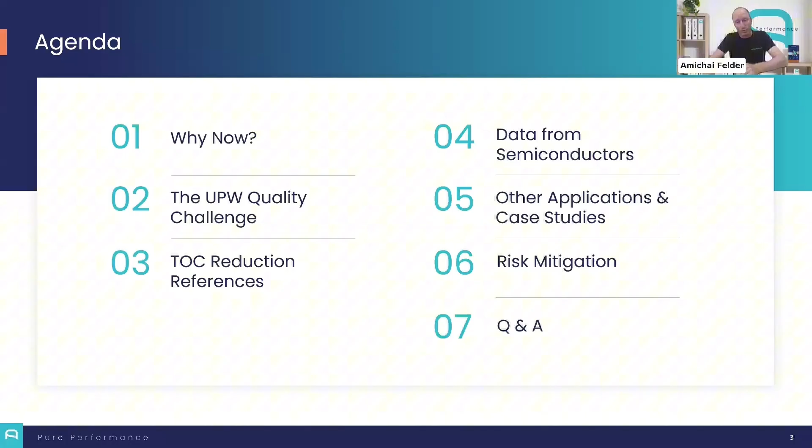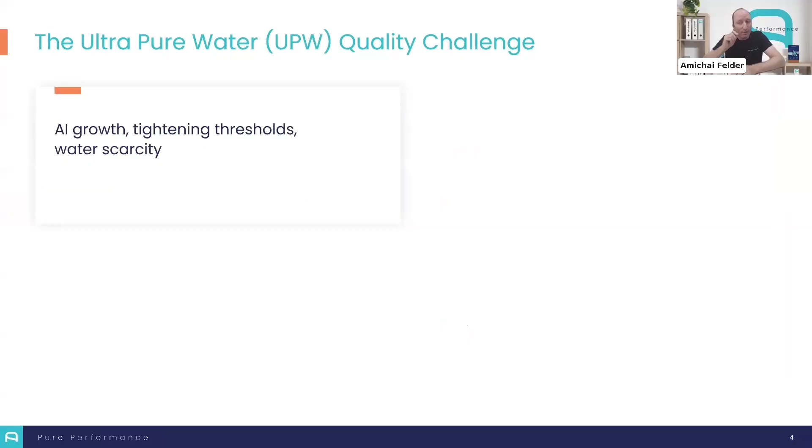Lately, the growing trend in production of advanced microelectronics and semiconductors has brought the need for a large volume of water with extremely low TOC residuals. The shift from surface, ground, or tap water to alternative water sources, such as wastewater, has also resulted in challenges of removing specific undesired compounds from the process. A good example is urea, if municipal wastewater is the source, or IPA, isopropyl alcohol, if the plant is reusing water within a cycle.

Now, I'm quoting from an article published lately: the trend of building reclamation plants is no longer a future trend, but rather a response to the challenges of water scarcity and the need for sustainable practices. TSMC's initiative in Arizona is a significant step towards achieving near zero liquid discharge. So the usage of alternative water sources and zero discharge is already here.

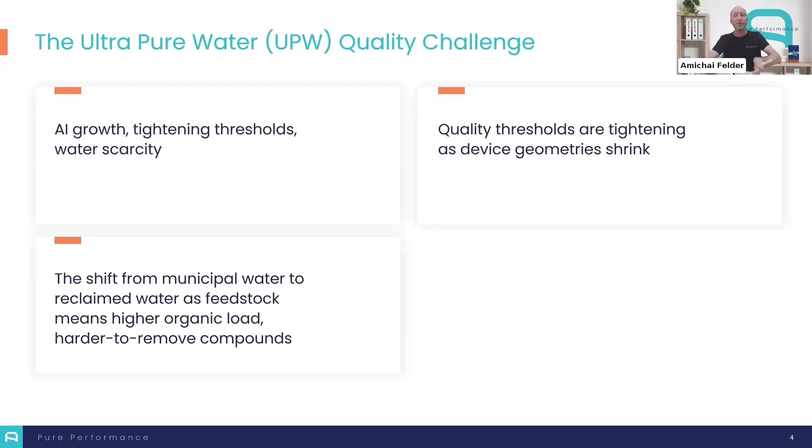In parallel, the thresholds for specific and non-specific TOC are going lower, and it's now easier than before to detect low levels of pollutants. The wafers are going smaller and require high quality ultra-pure water, and plants are doing internal risk management, with very strict internal regulation and monitoring. The traditional methods are simply not built for this feedstock to produce high quality water in high volumes.

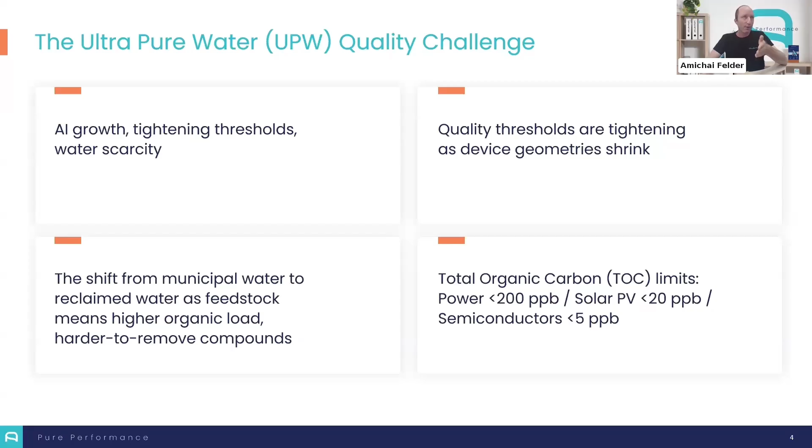The requirement for polished water TOC varies between the type of industry, from approximately 200 ppb, give or take, for boiler feed water, 20 ppb for photovoltaic and some microelectronics, and finally for semiconductor it can be as low as 1 ppb, sometimes even lower.

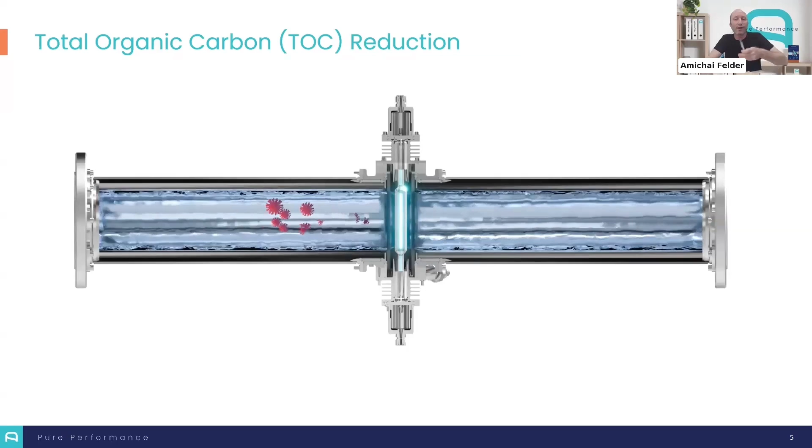Using UV for TOC reduction is not a new technology. It's applied when high intensity UV light triggers TOC destruction and molecule deformation, we can call it. It's done on a polishing step to achieve ultra-pure water post-RO with low conductivity and low TOC content. This process is usually done without an oxidizer, unlike typical AOP that uses peroxide or ozone together with UV to create radical formation and remove pollutants as a secondary pathway.

Okay, let's dive a little deeper here. Using a simple block diagram, I want to describe the different processes we are typically installed in. So, of course, the treatment of choice for the incoming water would be pre-treatment followed by a double pass RO, done to yield water with approximately 500 ppb of TOC.

I know this may sound a bit low for some of you, but this is a typical design value we usually get from clients. By the way, conductivity in UPW is very low, in the ranges close to zero, but we won't mention conductivity here. We are here to discuss the TOC.

In most cases for the microelectronics industry and solar panel, the requirement of 10 to 20 ppb will be achieved by a polishing step on the RO permeate using a TOC UV, followed by an EDI, mixed bed, or ion exchange. I will shortly explain why the downstream process is required here. For now, I'll just say Atlantium units are installed in more than 150 sites for this type of application alone.

Sometimes we'll have, in most cases, a UV for disinfection, a much smaller UV for disinfection downstream.

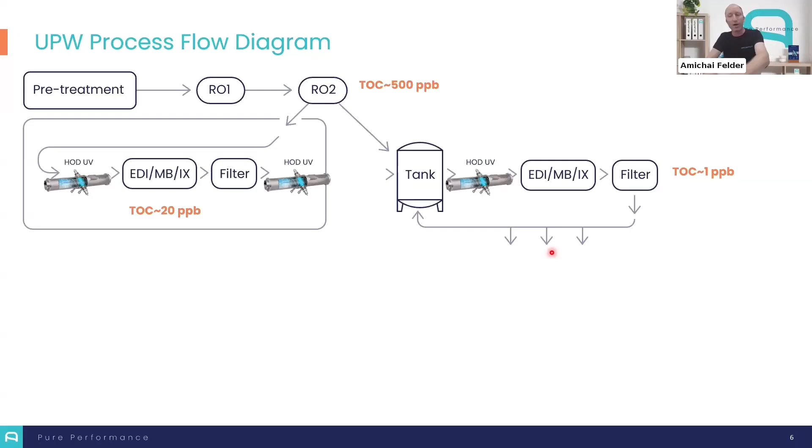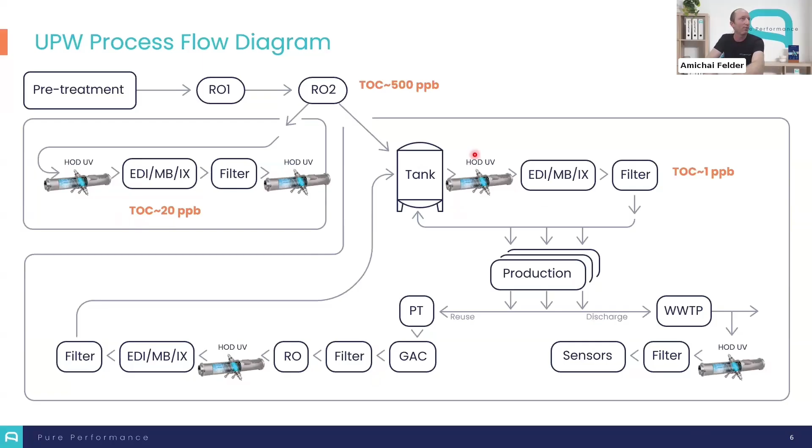So to conclude this slide, this nice slide, let's say we can call it a one-pass UPW loop, discharge and reuse.

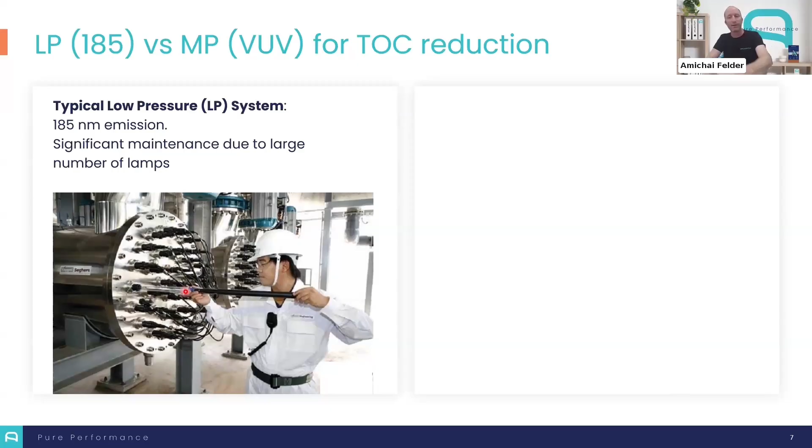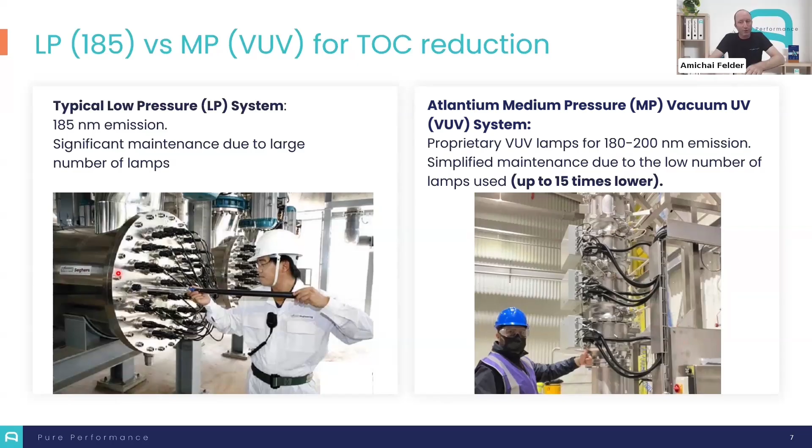We are offering the medium pressure UV with the VUV lamps. That means vacuum UV, that also have the emission at 185 nanometers. So this is how it looks like. And there are many differences between these two technologies, the medium pressure and the low pressure UV, even though both are called UV. I won't elaborate here, but in a nutshell, the HOD medium pressure UV has 10 to 15 times fewer lamps than the conventional low pressure UV. And the emission spectra is different.

Because one should take into account that TOC removal using UV has three main mechanisms. The first one is hydroxyl radical formation in the 180 to 200 nanometer range. These are radicals that are formed from the water and destroy the TOC by a secondary pathway. The second, and this is quite unique to medium pressure UV when comparing to low pressure, is direct photolysis of specific bonds within the TOC in a primary pathway, as they absorb wavelengths between 200 to 400 nanometers. For example, I can give here an amino acid: amino groups, carboxylic group, single and double carbon bonds, nitrogen-hydrogen bond, and so on.

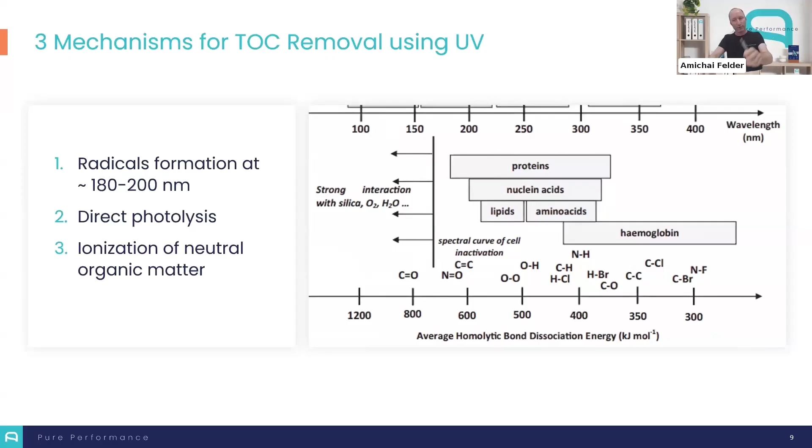So after going through some of the fundamentals, let's look at some of the references we have on removing organics worldwide.

When we first started using the medium pressure UV for TOC reduction a decade ago, the solar panel manufacturers in India were open to adopting this new technology. Luckily for us and for them, they were very happy with it, and I think we had no client that looked back at the old method. Each client who started purchasing the HOD units for his plant eventually kept purchasing more, for other sites or with the expansion of the existing site.

The shiny blue screen here is the Atlantium controller. Here we can see 5 systems, 6-inch, 3 lamps in each, that handle approximately 100 cubic meters per hour with redundancy, so 1 or 2 systems here are redundant, and the effluent quality is 20 ppb TOC.

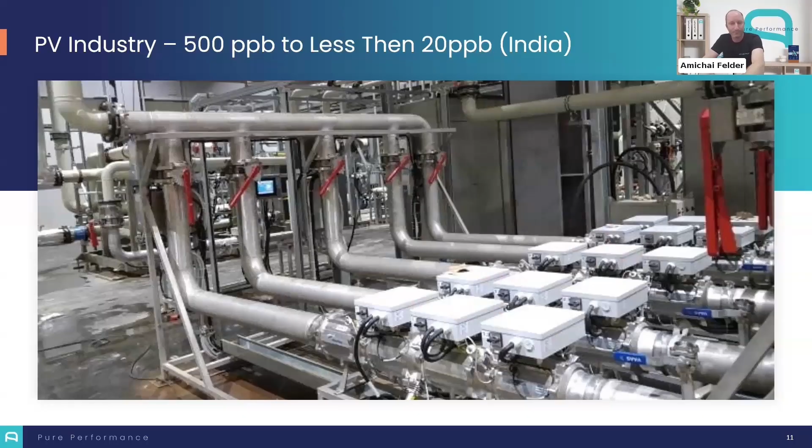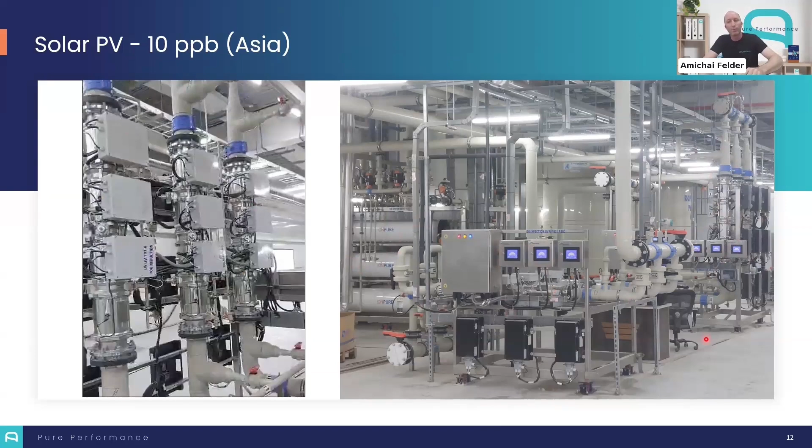Again, showing another installation in Asia. Pay attention to the EDI here that is downstream of the UV. Here we can count 6 Atlantium HOD systems, and it's easy to see what we discussed a few slides ago: we have 3 UV units for TOC reduction, vertical, you can see it in close-up here, and downstream of that are the EDI units. Then downstream, before production, we have the UV for disinfection, a much smaller UV unit.

This is from a large manufacturer in the semicon industry, where we installed dozens of systems. The black boxes mounted on the wall are in fact ballast modules, so each lamp has a dedicated ballast module. Just imagine how it would look if you needed 10 times the lamps. And if you notice, all units here are installed vertically. Each Atlantium unit can be installed horizontally or vertically, and most clients with footprint concerns choose to go vertical.

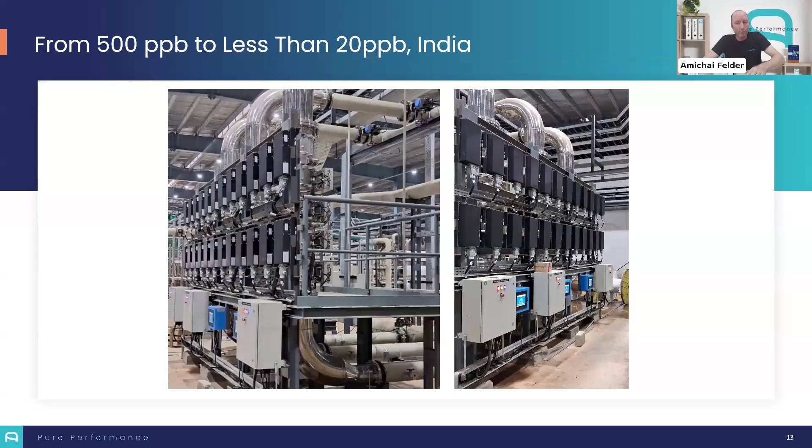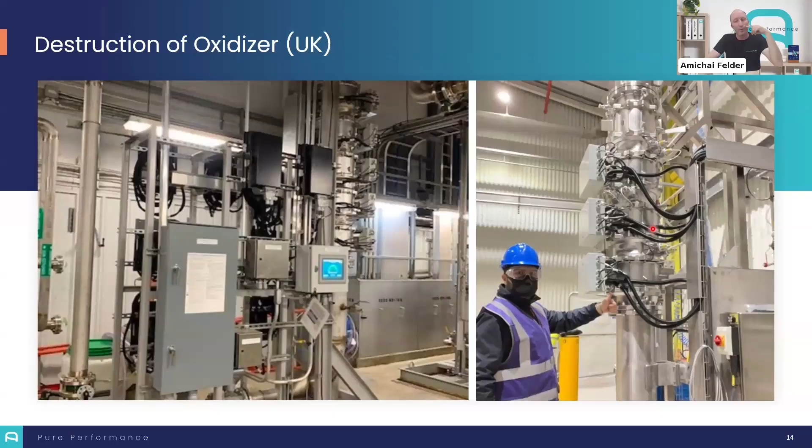This one is from the UK. In this case, the application is not TOC removal, it's chlorine photolysis, done pre-RO, for the pharma industry—so our solution is not only for electronics and not only for RO permeate. Another reason I'm showing this case is that we had so many installations of pre-RO dechlorination large systems that we decided to make smaller systems for disinfection to protect the downstream RO membrane. This is because of feedback from clients saying the UV was not only knocking down the chlorine, but also resulted in better membrane performance. So if we have time at the end of the webinar, I'll show a case on RO protection.

In this case, it was 1500 GPM, give or take, reaching a very low concentration in the outlet. I think what allows us to do so is the geometry and design of Atlantium systems, where we have internal reflection of light within the reactor. Without going into details, in simple words, we are mixing the light within the reactor and not mixing the water in the illuminated chamber. That prevents the escape routes that may occur in different designs.

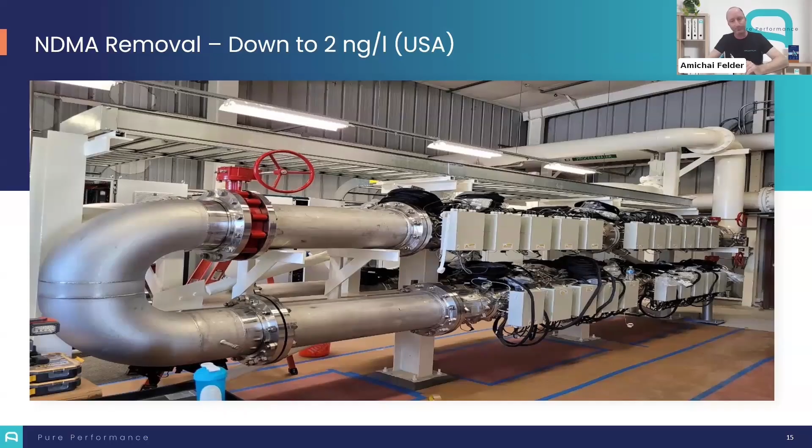Again, an installation TOC for 20 ppb. This time it's horizontal. Now maintaining the 10 to 20 ppb is very standard in our installation.

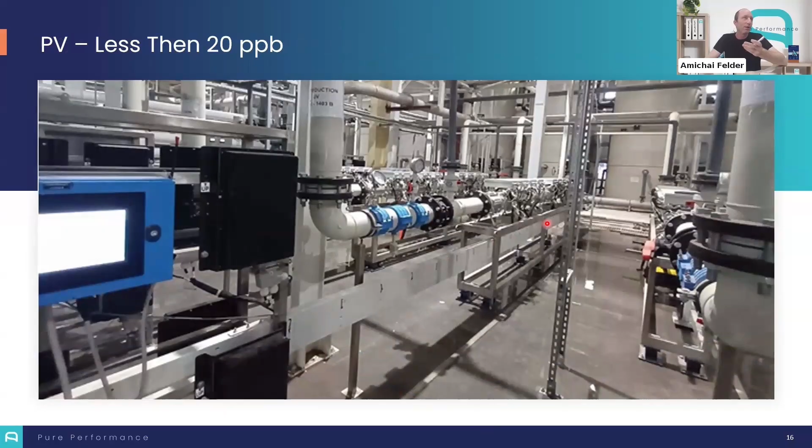For the sub ppb TOC, we wanted to validate our technology. It required a special lab that operates in clean room conditions, and I will let Nitzan elaborate on this. So Nitzan, the stage is yours.

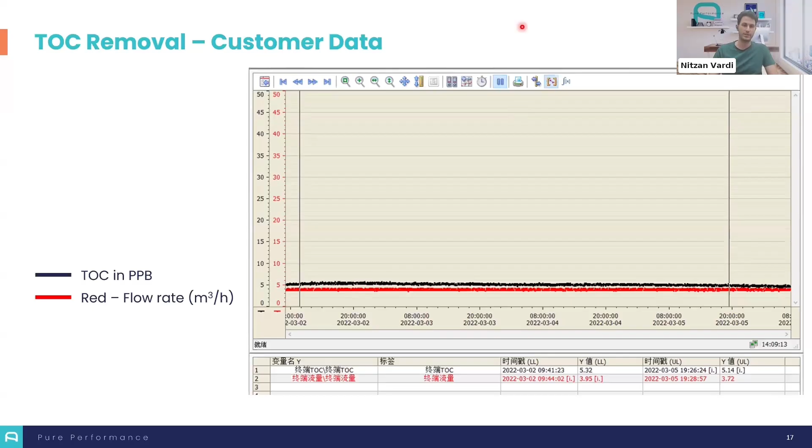I'll present our TOC reduction validation, or since we already knew we can reduce TOC levels, I would say, as Ami mentioned, sub-ppb TOC reduction validation, as it was mostly to test our HOD VUV ability to reduce it to that level and comply with semiconductor industry demands.

So the validation took place in Minnesota in the FTD labs, which, just on a side note, I guess some of you might be familiar with Gary and his team, and they were just extremely professional. It was probably the best place to have that validation.

So what we had was a circulation loop of 1 cubic meter tank of water from the primary treatment of polished RO ultrapure water, going through alternating UV technology. So once through low pressure UV, it was a 4 lamps unit of standard low pressure UV, and once with the Atlantium medium pressure HOD VUV.

We had our RZ104 unit with 1 lamp operating at 40% power, meaning 400 watts. So just to be clear, each time only 1 UV was operating.

After the UV, we had ion exchange resins, which Ami explained the importance of having downstream to the UV, and then ultrafiltration before consumption for lab purposes and going back to the tank.

During the test, we measured hydrogen peroxide and TOC levels at one sampling point, going back and forth every 4 hours from upstream to downstream to the operating UV.

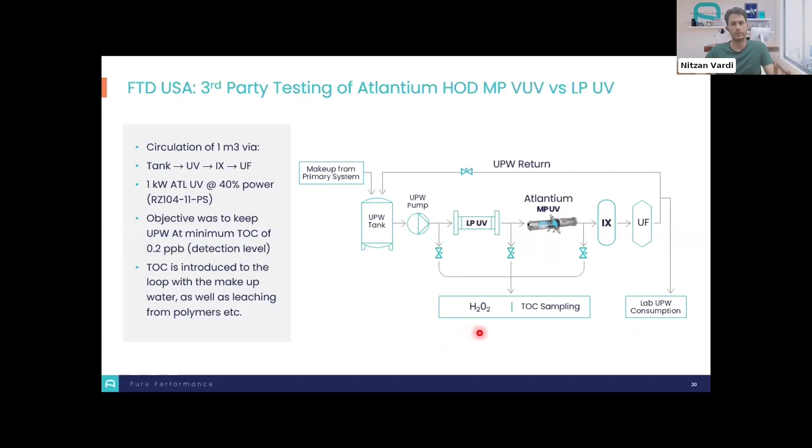Peroxide was measured as well because we know residuals of it decrease ultrapure water quality and can reduce yield. And so we wanted to compare residual peroxide formation between the two UV technologies.

And now for the interesting part. So here are the results. In this figure, we can see the concentration level in ppb over a span of 72 hours.

The blue line is for the TOC levels, the yellow line is the total carbon, and the red line is the difference, which is the inorganic carbon, primarily carbon dioxide. And this is all with our RZ104 on 40% power.

So on the first section, first 24 hours, the UV was off. That was to enable the TOC build up to a level of over 2 ppb. And then it alternates every 4 hours between out of the HOD VUV and into it.

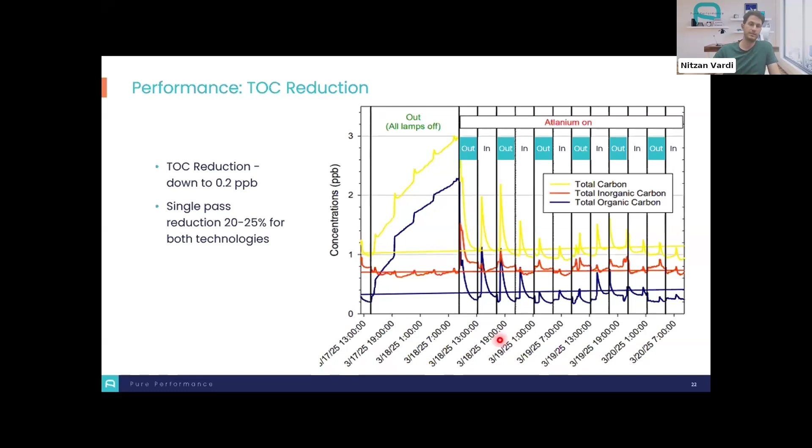Based on that, we got to a range of 20 to 25% TOC reduction within a single HOD VUV pass. Over time, we can see that 40% power was sufficient to reduce TOC levels to 0.2 ppb and stabilize it. This might be a little easier to see in the next slide.

Here we can focus on one transition and see how TOC level drops and stabilizes while measuring continuously out of the UV.

In this figure, we can see again the concentration level, this time over a span of 6 hours: 2 hours with lamp off and 4 hours with the lamp on at 40% power, sampling out of the HOD VUV. Here, black is the TOC, red is the inorganic carbon, and green is the sum of both, with a pink line marking the activation of the HOD VUV on 40% power.

Zooming in like this makes it much easier to see the first pass effect and the TOC reduction all the way down to 0.2 ppb.

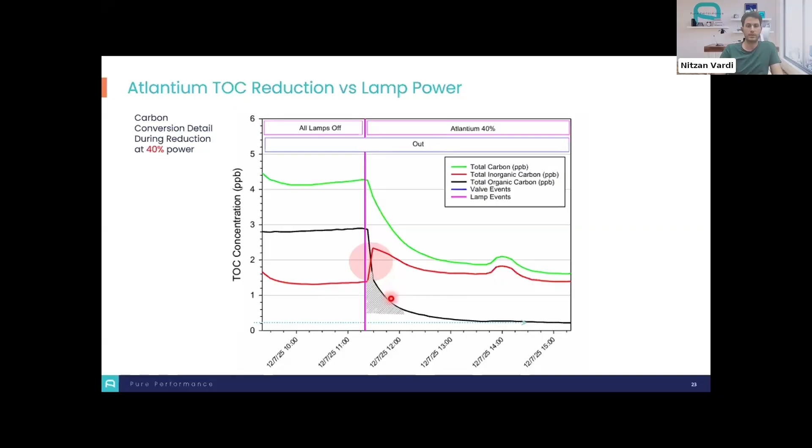But I actually want to focus on the inorganic carbon, the red line, in which we can see very interestingly a significant rise. That rise indicates a full oxidation process, meaning converting TOC components into harmless carbon dioxide and water, which offers distinct operational and quality advantages. We didn't really expect the full oxidation to be that significant, and seeing it at 40% power made us curious about how applying more UV power would affect this process.

So here in the added figures, they're the same, but in the middle, the RZ104 lamp is on 70% power, and on the right, it's on 100% power, meaning 1 kilowatt.

Now, when looking at the effect of TOC removal with applying different lamp power, we see not only that TOC drops to the detection level of 0.2 ppb faster, as you can see with the light blue arrow, but we also see that the step of inorganic carbon is higher as well.

So this is a very nice way to see that higher power is correlated with a higher level of full oxidation to carbon dioxide and water. This can also impact the downstream resin by extending the throughput of the resin, meaning there will be more volume going through the resin before it needs regeneration.

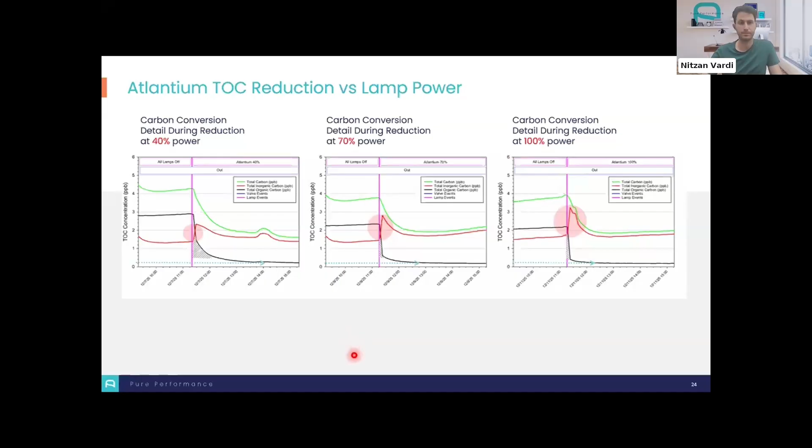Going forward, another part of the test was measuring peroxide formation. If with the TOC levels we wanted to show we can achieve the same results as low pressure UV, when it comes to residual peroxide, we wanted to show we can do even better.

While peroxide is important for the TOC reduction process, residual peroxide lowers water purity and harms yield. Low pressure UV relies only on hydroxyl radical formation to reduce TOC, and a byproduct of that is relatively high concentrations of peroxide as well.

Our medium pressure VUV, as Ami described earlier, relies on 3 different mechanisms for TOC reduction, allowing us to achieve the same TOC reduction while producing significantly less residual peroxide. Let's go over the results to support that claim.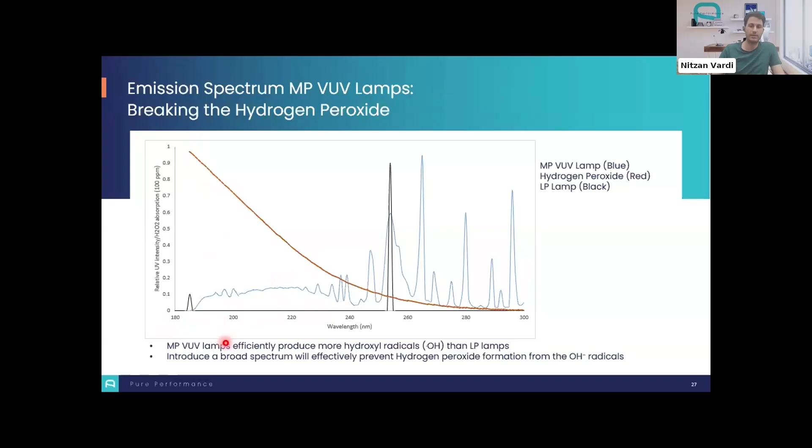While the highest absorption level of peroxide is at 185 nanometer, it is still very sensitive in a spectrum of up to about 220 nanometer, which makes the medium pressure VUV much more effective at reducing it. So peroxide reduction is actually another application that we can do with our VUV systems.

To sum up our sub-ppb validation process and results, I want to go over the advantages of medium pressure VUV for TOC reduction in the semiconductor industry. First and foremost, TOC reduction results: we have shown we can stabilize TOC levels at 0.2 ppb and keep it over time. We have shown we can convert most TOC to carbon dioxide, achieving full oxidation of TOC. And we have shown we generate extremely low levels of residual peroxide. We can do all that with a very low number of lamps, which makes operation and maintenance procedures accurate, comfortable, and much easier.

So that was my part, and I'll pass it back to Ami to showcase some more relevant applications. Thank you, Nitzan, for presenting these fundamental results. I think it's really not common to see the process in such high resolution as you showed, and thank you for that. Let's see what additional applications we can offer for this segment. Some of these I didn't mention before in the process flow diagram.

RO protection - I could talk for hours about this. It's really my favorite application here, but to make a long story short, during recent years and after extensive research, we began implementing a novel application of using the HOD UV prior to an RO membrane in order to improve membrane performance, and more specifically, to extend the time between RO CIPs and filter replacement events.

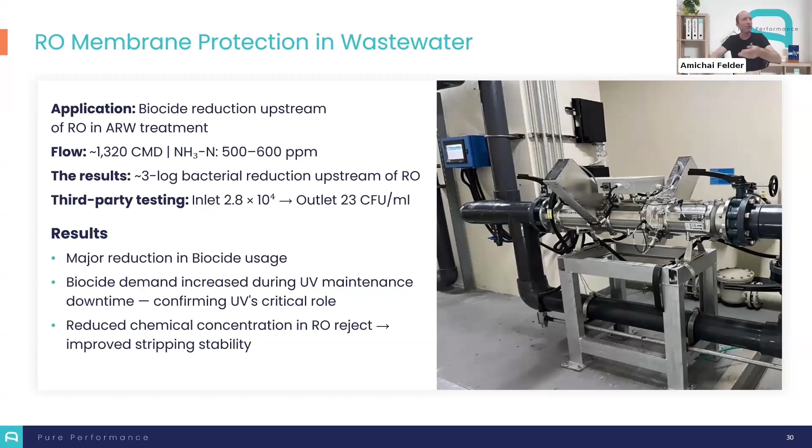Moreover, when the HOD system went into maintenance, the RO performance was declining again. So the savings here was not only direct savings from less biocide, but also it made the RO brine treatment much more effective, as now it had much less biocide in it.

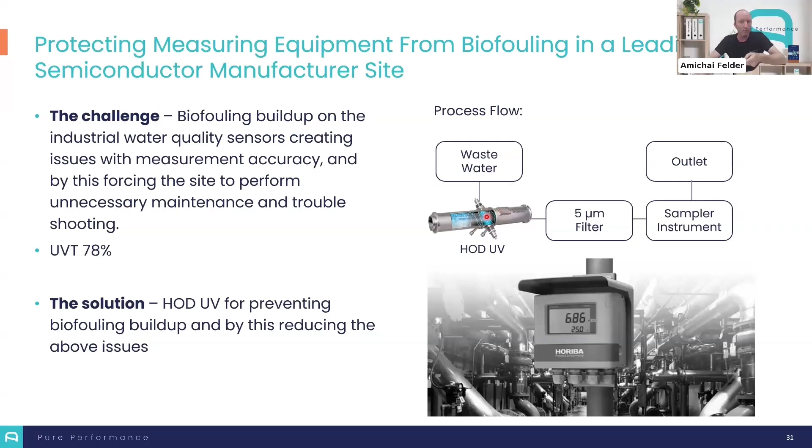Similar to RO protection, we have applications for biofouling prevention on the filters and sensors located on the effluent line. The effluent line is typically monitored much more extensively than in municipal wastewater systems or even in industrial systems, because of environmental compliance. So clients experiencing post HOD UV installation are seeing reliable sensor readings, reduced false alarms, and lower maintenance burden here.

For those who attended last week's webinar, this will look familiar. Atlantium has partnered with Enspired Solutions, a USA-based company, to advance the treatment and destruction of PFAS through an innovative photochemical reduction process - not oxidation, but reduction. If you want to listen to last week's webinar, you're welcome to contact us; I believe there's a recording on the YouTube channel. But similar in concept to PFAS destruction, lately we're engaged in many trials for ARP.

Unlike AOP, advanced oxidation process, ARP is advanced reduction with electron donor instead of a radical donor. This is done to remove oxidized pollutants, such as PFAS, but can also be applied to chlorate, nitrate, and many more. Using the medium pressure polychromatic wavelengths, we try some types of electron donors to generate highly reactive species capable of breaking down these oxidized compounds.

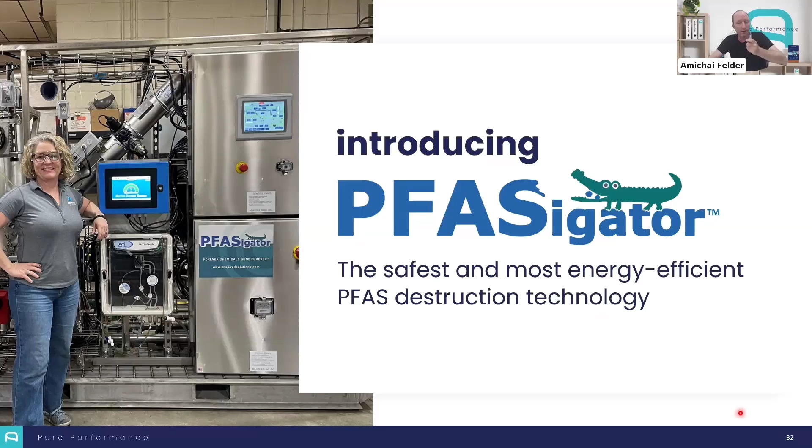So stay tuned for it, because it's a novel application. It's very interesting. Okay, before we move to the Q&A, some key takeaways here.

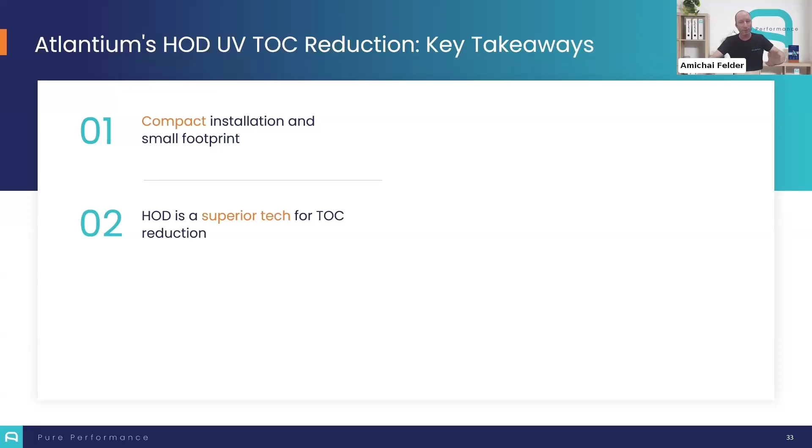We discussed the growing need for high quality UPW in large volumes. The HOD technology is superior for TOC reduction in performance, monitoring, and OpEx. Unlike in previous webinars, we didn't go over all the fundamentals of the technology, but you are more than welcome to challenge us about any of these statements. I did ROI calculations many times, and I guarantee we can show almost for any case. The HOD is validated for reaching sub-ppb levels of TOC while minimizing the risk of peroxide formation.

Low number of lamps, direct photolysis. I think I said it all. Thank you so much for attending. Let's take some questions in the time we have left.

Some of the questions were the same, and we will share the recordings. I believe someone was asking if it can be retrofit into an existing facility. Of course, and we did it quite a few times, retrofitting the technology to an existing conventional treatment.

Would a system for TOC have a different type of lamp compared to disinfection? Absolutely. In most cases, we will use VUV, the vacuum UV lamps that also emit in the lower wavelengths of 180, 185. What is the required energy for the process? It's in the range of 0.1 kilowatt-hour per cubic meter per one order of magnitude of removal.

How do we prove it works on our water chemistry before committing? You mean how can we give the guarantee? In most applications where we see a double pass RO going to the plant, the water chemistry is not surprising for us, and we can guarantee results for it. In some cases where special pollutants are required to be removed, like urea, IPA, chloroform, whatever, we will do some testing. We will examine the water matrix, examine the absorbance spectrum of the pollutant, and if needed, we will perform a pilot.